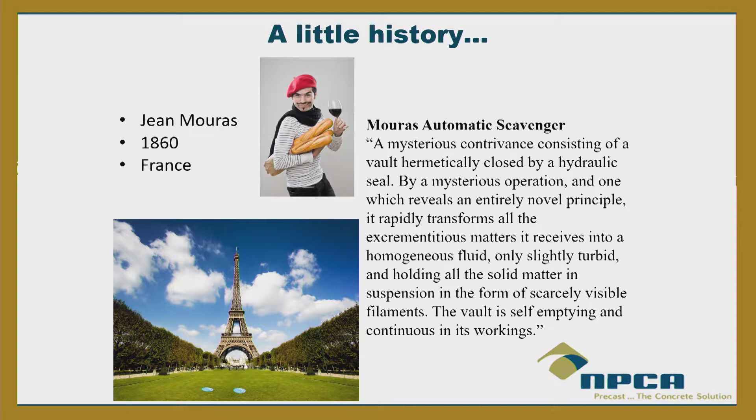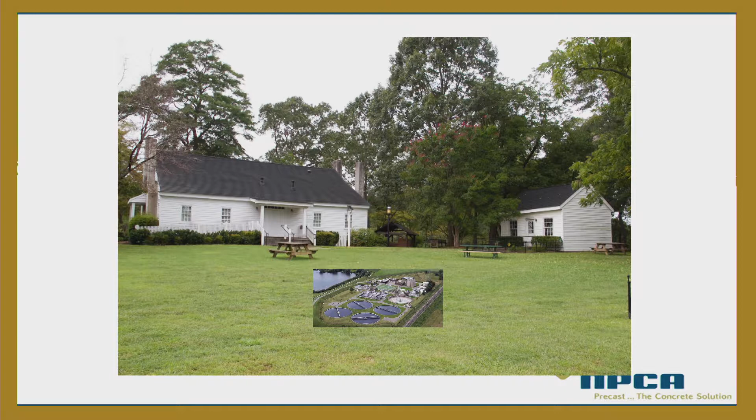That's right - self-emptying. It's really an amazing piece of infrastructure sitting right in your backyard. I mean, I'm showing a big centralized sewer system, but really it's a sewer system in your backyard. Very sustainable, and it does this pretty miraculous thing and returns it to the soil. It's really an amazing piece of infrastructure. I don't think a lot of homeowners realize what they've got back there.

So very important to maintain, but also important to be aware of - it could pose a safety threat. One part of that system, just one part of the whole system, is the septic tank. Whether it's precast concrete or plastic or fiberglass or what have you, the septic tank serves a very important purpose in that chain in order to take that material.

There is some treatment that goes on in the septic tank - there's some separation mainly, some physical processes, some biological and chemical processes that happen in the tank before it goes out to the field. But mainly it's there to prevent surges from going to the field, help in separation, help reduce TSS, a little bit of BOD. But it serves a very important function because it's the very first thing in the chain.

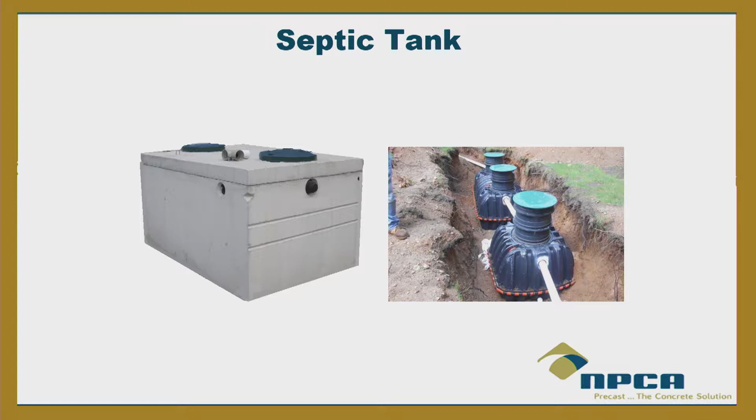Usually the tank is the first thing, so it's got to be installed efficiently in order for the system to perform. Now, in order to maintain and take care of this very important vessel, we have to have access points. Different states have different requirements, but basically you usually have to have an access point above the effluent and above the influent, and sometimes above the baffle wall as well in a two-compartment tank.

So tank access is very important for maintenance and inspections. The TCEQ rules - I'm just going to go over the rules real quick as a refresher - say that the inspection or clean-out ports should be located over the inlet and outlet devices, and that the smallest dimension should be 12 inches.

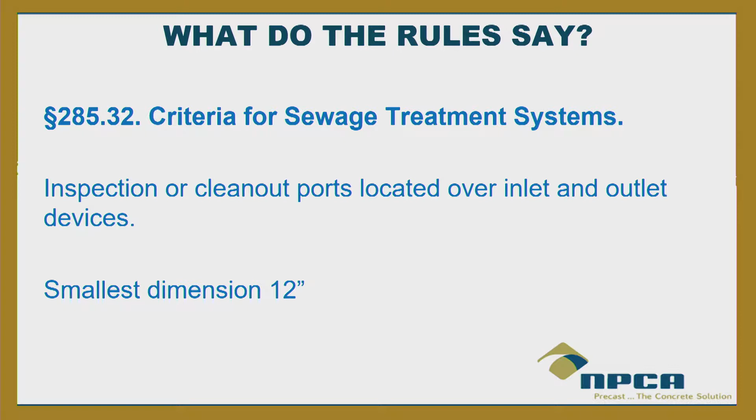So in a lot of cases, are they 12 inches or larger? Usually around 24 inches above the inlet and outlet, would you say, or just 12? 16 or 20? Okay, 16 or 20 - enough to get the effluent filter out. For those of you who've been in the industry a long time, would you say there's a trend that access is exposed more and more? Or do we bury them more? Anybody agree? Some say no.

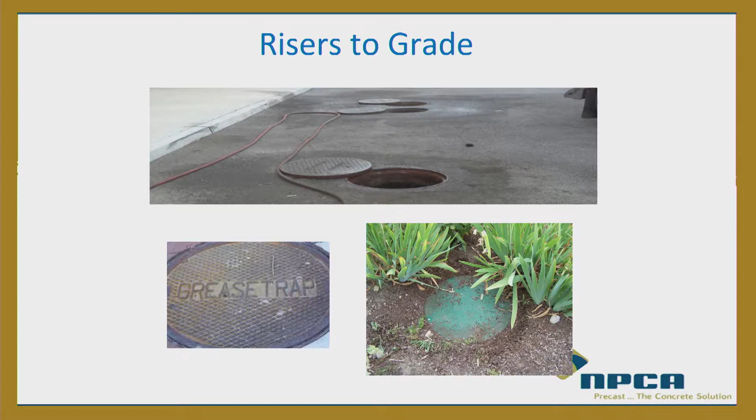Okay, well it depends on where you are I guess. They don't charge enough money to dig them up. From the feedback I get talking to people around the country, it seems like we're going more and more to grade, because we don't want to have to look for it, and there it is. So the risers to grade - whether it's just a short concrete riser or a really tall riser - that might be a challenge.

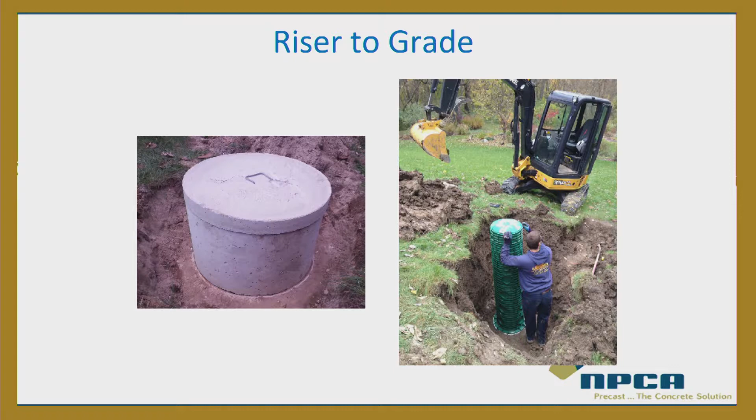But we're bringing these risers to grade, okay. Now in Texas, the rule is that tanks buried more than 12 inches shall have risers, and the risers should come to no more than 6 inches below the surface. So would you say in most cases it comes right to the surface? Is that fair, depending on where you are? Okay.

It also says the risers should be sealed to the tank. So now we're talking about safety, but we're also going to talk about water tightness and efficiency of the tank. Because when we're talking about the riser system tied to the system itself or to the lid, that goes a long way to making it watertight. To have a watertight tank - a lot of times the seams in the tank, whether mid-seam or top seam, are fine, but if you're going to get any leaking water, it's at that riser. You ever see that? At the riser, right? So the first thing we can do to make sure we have a watertight riser, and a laterally strong riser that's not going to move, is to have it embedded - to have that first section embedded.

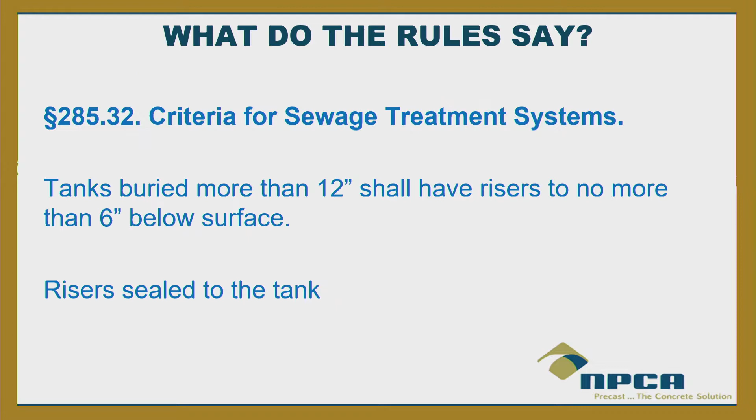I don't think it's an actual requirement of TCEQ, but it just says that it shall be sealed to the tank. So how do we seal it to the tank? If it's not embedded, then what do you seal it with? It doesn't go that far. Some people do go farther than that, they say how to seal it. But if it's got to be sealed to the tank, what do you use?

Ram-Nek? Okay. Tar? Okay. So like a butyl sealant, right? Something like that? All right. A butyl sealant, well, I'll get to that in a minute. But a butyl sealant works very, very well in keeping that sealed. Now, unless the manufacturer of whatever you get proposes something else - I know there's a foam sealant that I saw that was part of one of the riser section manufacturers. Whatever they suggest, that's what you should do. But for a concrete riser section, a butyl sealant works very, very well.

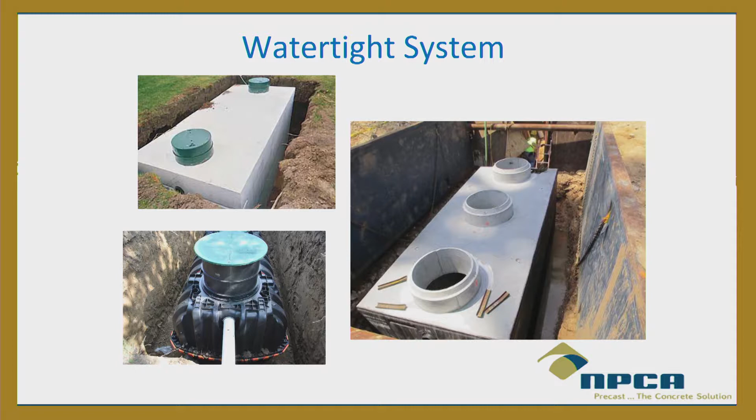Now, there are lots of homemade systems out there, or lots of experts. Like this one, for example. I found this on the internet when I was doing a search a couple years ago. Somebody was asking, any recommendations for a septic tank riser? I just had my tank pumped, and I had to dig up the access cover. I'd rather not have to dig it up next time. It's about 18 inches deep.

And Just a Lurker - I hope Just a Lurker is not in here, by the way, and I'm sorry if you are. We can talk later.

Most septic tank companies sell the plastic risers, but they're expensive. You know what I would do? A 55-gallon drum and a lid. Cuts down work super duper and can often be found for free. I'm not sure a plastic drum and lid would take the weight over time, but my steel drum is still okay after 15 years. So you have these sorts of experts.

Now, how many of you - I'm almost afraid to ask this question - how many of you have seen the 55-gallon drum riser? Oh my God. Okay. All right. 55-gallon drum riser. Wow. All right. Well, not recommended, but you might say, oh, it works just fine. But maybe if it's embedded, I don't know. No, I wouldn't say - I wouldn't recommend it. I'm not going to go that far.

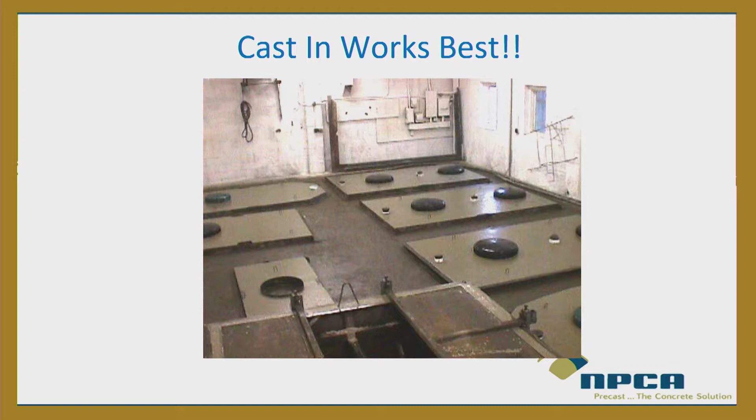So cast-in works best. If we can use a system that is made, that is intended for this, cast-in systems work best. Even if you're using a concrete, a grout of some sort to cast it in on site, that's okay, but it's still - the soil is going to move, the tank is going to move. It's the same thing as trying to grout in a pipe, which apparently has been done there too. And grouting in a pipe is not a great way to make a pipe connection watertight, as you probably well know. Okay, because the pipe is going to move, or the soil is going to move, and the thing about cementitious grout is it doesn't have any elastic properties whatsoever. So in other words, it only moves once, and then after that, it cracks, and then water's going to get in.

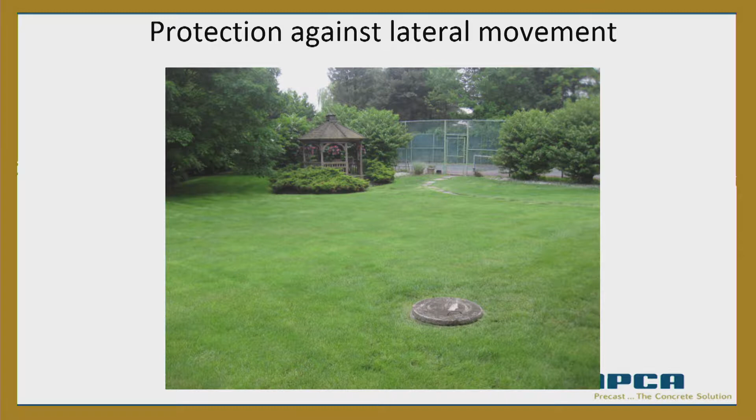So the same thing with the top. If you have a top and you grout it, but it just sits on the lid and you grout it in, then there's still a chance that it might dislodge after a period of time. But it's better than just sitting it there. Because we also want to protect against lateral movement.

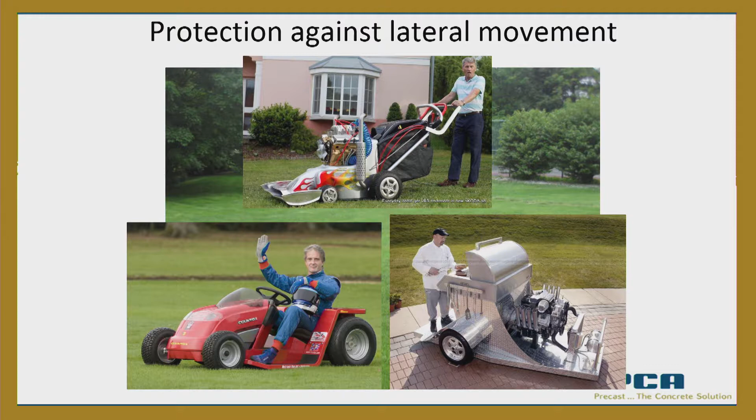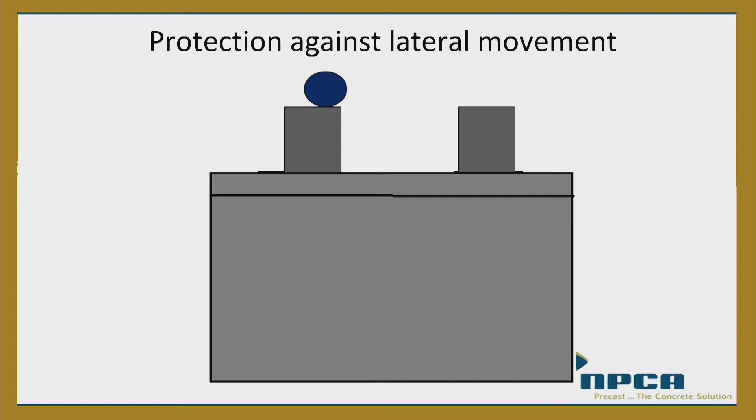Now, I know that most of these tanks are not rated for traffic, but some of these mowers - have you seen some of these mowers? I mean, these mowers are almost like a vehicle, and so they take these turns right over top of these lids. That's a significant amount of force when you think about it. That's pushing that, that can push that riser over. Have you ever opened a septic tank lid? Do you see like a quarter moon down there, or maybe a half moon? So I see a few nodding heads. So that's something that we want to obviously try to avoid for maintenance reasons, but also for safety reasons. How stable is that riser?

So the precast riser sections, another thing that we can do, if it's not cast in, is at least if it has a keyway that you can set the riser in, and at least it's got some lateral stability to it, and then the adjacent risers above it. And then you can still seal those with a butyl sealant, but it gives it a little bit of lateral stability.

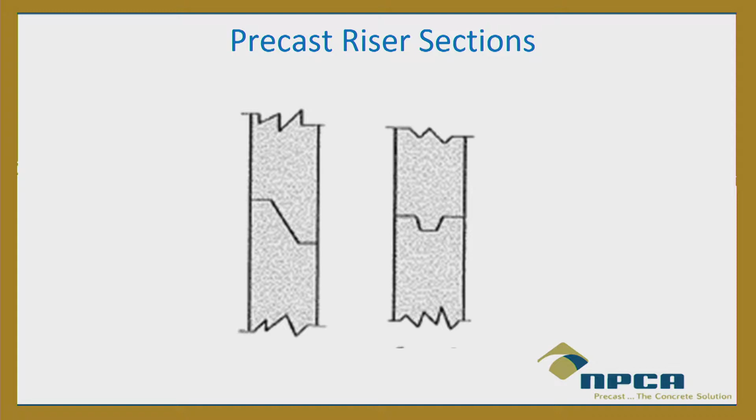Now here's the part about the joint sealant. The proper installation - I talk about this in my 115 class too, because that's about installation - but real quick, if you're going to use a joint sealant, the butyl sealant, C990 butyl sealant is the best sealant to use, because it's made specifically for these conditions.

And the thing is if you're using butyl sealant, just do one thing: knead it together. It just takes a minute. I know if it's cold out, that sealant's tough, and if it's warm out, it's real sticky. But if you can somehow knead that sealant together rather than just overlapping it or putting it side by side, it'll make a big difference in keeping that water out, or roots, or anything else. Because if you just overlap it or put it side by side, especially on risers, since you're not talking a lot of weight there, it can leave a pinhole. But if you just take a moment to knead it together and then lay it, you're going to have a much better chance of getting a tight seal.

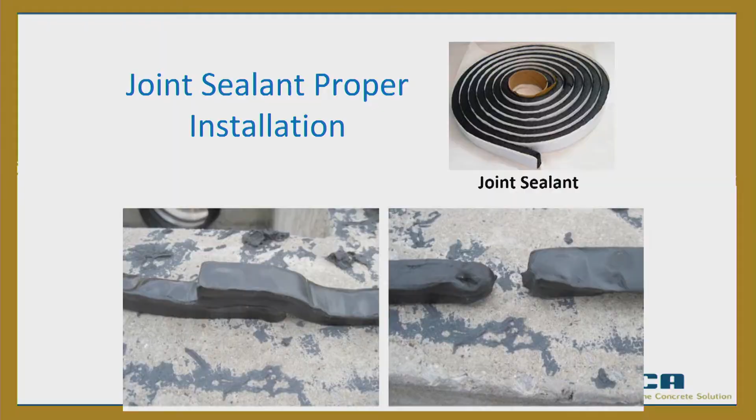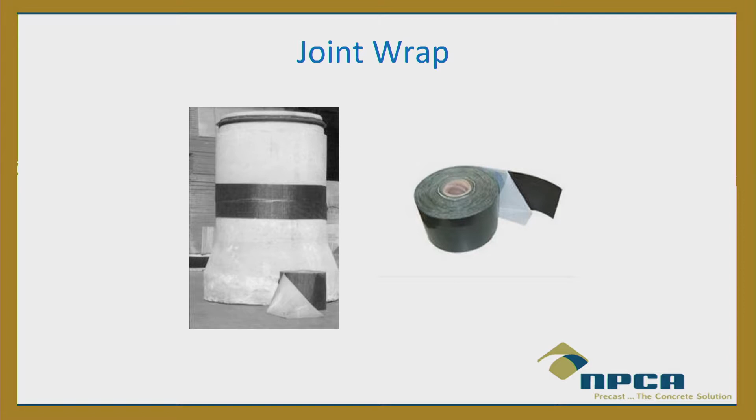Also, if you're looking at sealing risers, we're still talking water tightness here, you can use a joint wrap. Sometimes it's called chimney seal, but that can also be used on the vertical riser sections, if it's a manhole section or just risers or donuts.

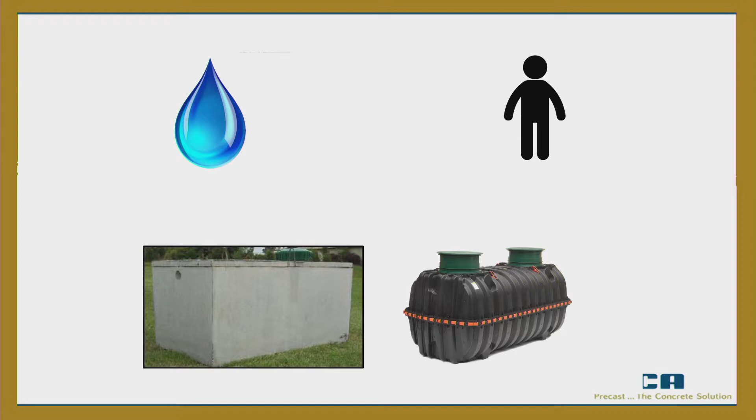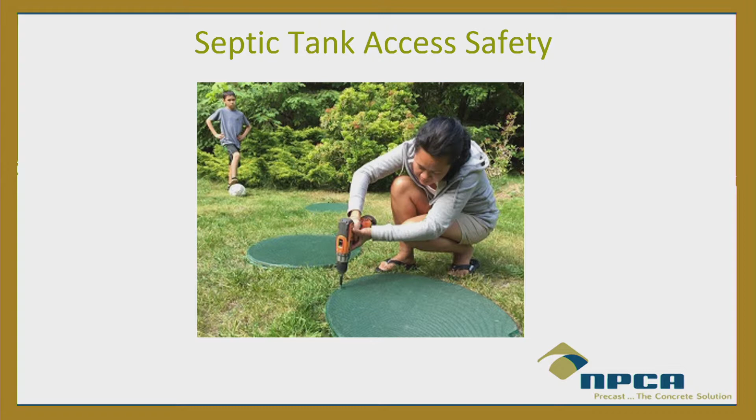Okay, so other than keeping water out, we also want to keep people out of the tanks. We want to keep people out, we want to keep pets out. We definitely want to keep water and people and pets out. So the access safety - let's talk about access safety for a minute. First of all, what do the rules say? 285.32: risers shall be fitted with removable watertight caps and prevent unauthorized access.

Now, people are going to get into a tank a couple of ways if they're unauthorized. They're either going to get in it accidentally, where they step on it and it's been corroded, or the structural integrity of it has somehow been compromised and they fall through. Or it's partially dislodged and they fall through, or it's not on at all and they fall through. So there's accidental entry, obviously unauthorized as well, but accidental. And then there's curiosity entry - somebody's trying to get in because they want to know what that mysterious gray or green circle is in the yard, especially kids.

I have a 6-year-old, I know how it works. They see that out there, and they see this shiny truck come every few months, hopefully, and a guy sticks a hose in there and then leaves. What in the world is in there, right? So then there's the curiosity part.

So that's a little harder, the accidental fall part. That's just having a system that is strong and is not compromised somehow, that hasn't been compromised by UV rays or what have you. Then there's the part about keeping people that are trying to get in, at least to a certain extent - at least to dissuade them from getting in, if they go at it and go, 'all right, let me see here, oh, I need a hex tool or I need an Allen wrench, you know what, I'm not even going to bother.' Sometimes it just takes that much, and then they just go away.

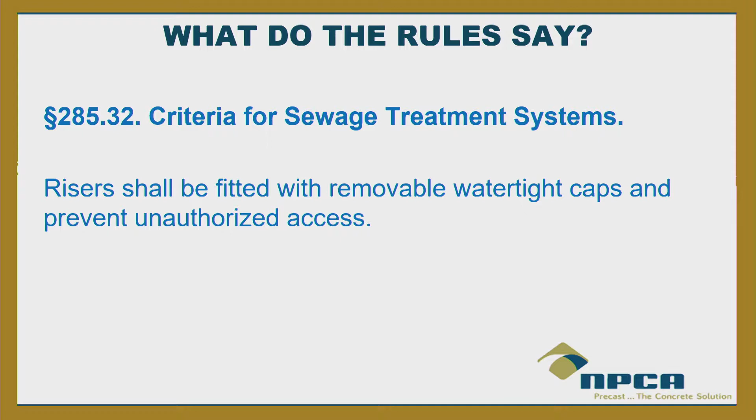That's an owner thing. So what I would suggest in those cases, when I talk to maintenance providers or parents, is take the mystery away. If the kids don't know what's in there, show them. Open it up and say, look, that's what's in there, and it's dangerous and it can kill you. Do you have any questions? Then the mystery's gone. They've seen it, it's dirty water. Maybe that works for some kids, maybe it doesn't. So that's unauthorized access.

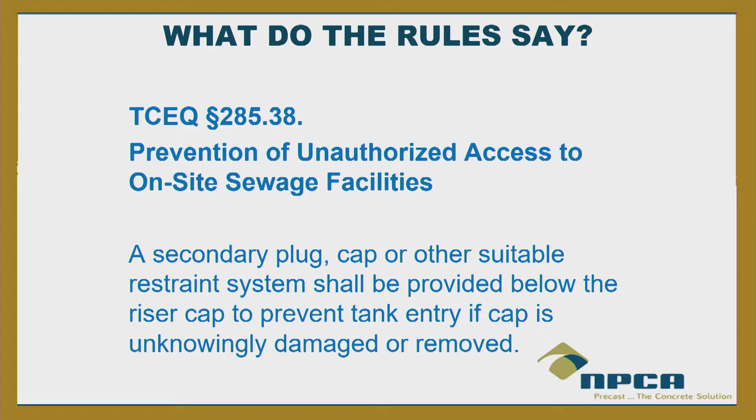Now the TCEQ goes on. That was Section 32. There's a section just for this, just for unauthorized access. I've never seen that in any other code. Prevention of unauthorized access to on-site sewage facilities: a secondary plug or cap or suitable restraint system shall be provided below the riser cap to prevent entry if the cap is unknowingly damaged or removed. So the idea there is to catch somebody, or at least provide some sort of secondary restraint if the first cap happens to fail.

Now that's not going to dissuade the curiosity people, but at least it'll dissuade the accidental people.

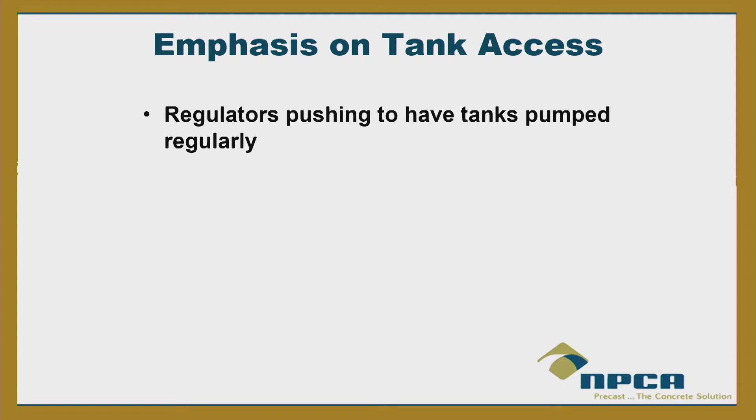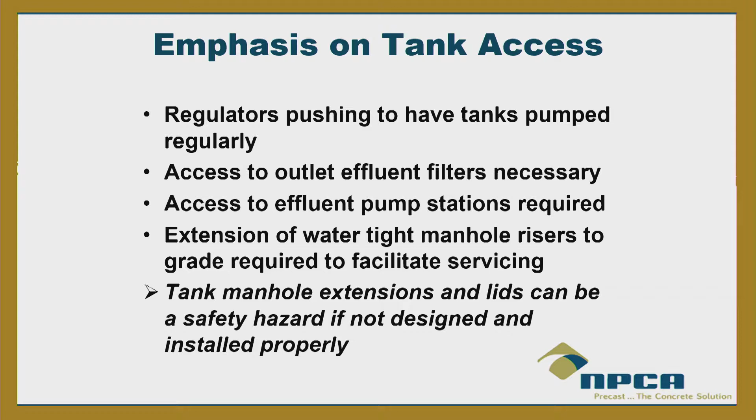We keep harping on homeowners to have their systems maintained, so we have to have it pumped on a regular basis. We need access for the outlet filters, the effluent filters. We need access for the pumps. Extension of water-tight manhole risers to grade facilitates servicing. Tank manhole extensions and lids can be a safety hazard. So these are the things that are pushing us more and more to having these lids exposed. And you may have had these situations happen here in Texas. I'm guessing it has, for these rules to be in place. But it happens all over the country.

This story happens way too often throughout this country, throughout North America. And it's an avoidable tragedy. It's just very, very sad.

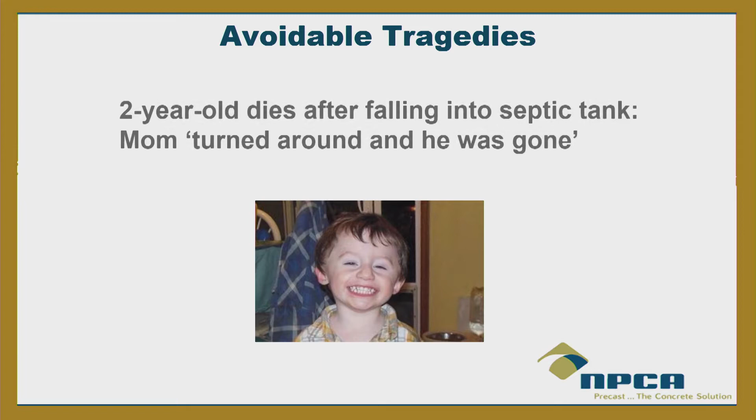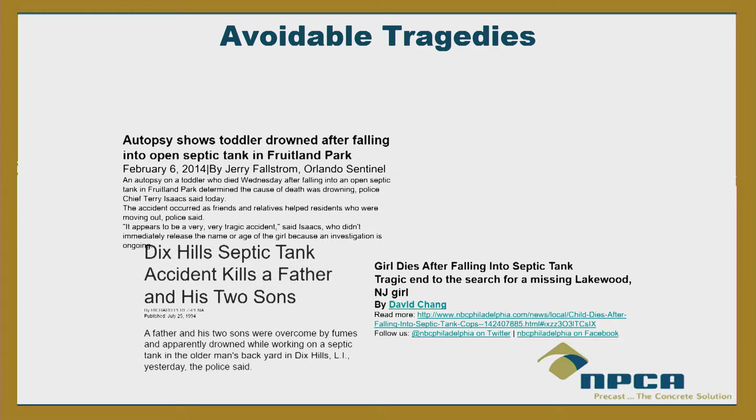For that story, for every story, there's more and more and more. You just do a quick search, from all over the country. And it's not just kids, it's adults, it's service providers, it's pets. First of all, homeowner education is critical to try to teach them about what's in that tank, a little bit about the dangerous gases that are in there, and the importance of having some sort of secondary mechanism in there.

Think about it: if we have a swimming pool in the backyard, we get real worried about the kids. When we have a swimming pool, we have those covers in the winter. If we have a retention pond nearby, parents get worried. But then we have the septic tank in the back, and all it's got is just a cover, right? And unlike a swimming pool or retention pond, you can send your kid to swimming lessons all you want—it may not help in a septic tank. It probably won't.

So here's a situation where we had 3 men. I forget where this happened, but one by one—it was a situation where one man went into the sewer system and was overcome by poisonous gas. We're talking about H2S levels up near 1,000 ppm or something crazy. So he was overcome, and then the second person looks in and tries to go rescue his friend. He was overcome and died. And then a third one did the same thing. In a lot of cases, that's what happens here.

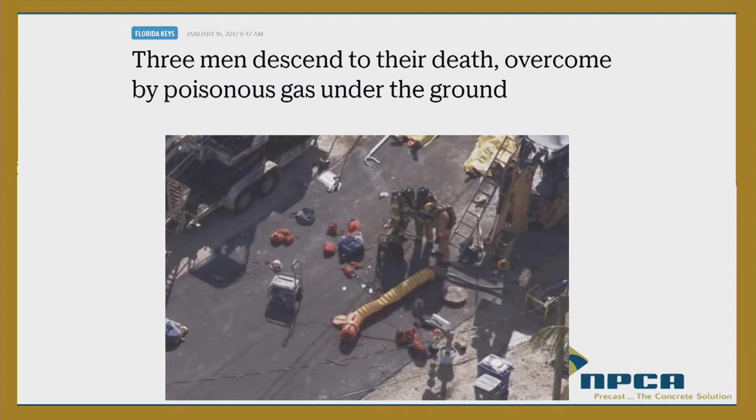I read a story about a man who rescued a child. He went into a septic tank, rescued the child. The child was saved, but he unfortunately succumbed to the gases. So if it's not the drowning that'll get you, it's the gases, right?

Because those poisonous gases, when you're talking about inside a septic tank, when you have this digestion that happens, you have all these gases that are released: methane, hydrogen sulfide, carbon monoxide, carbon dioxide, ammonia. There's gases that are released that are very, very dangerous.

H2S gas just by itself—if you're exposed to even as low as 100 ppm, you can get eye irritation, coughing, the symptoms. Up above 100 to 150, loss of smell. So that's olfactory fatigue.

The dangerous thing about this gas is you can stop smelling it. You don't detect it anymore. First, when you smell it, you detect it—that rotten egg smell. But after a while, it's like, oh, it's not here anymore. Well, it's still there, but you're suffering what's called olfactory fatigue, where you're not actually smelling it. And that's even more dangerous, because now you're no longer even aware of it.

Then when we get around 500 ppm, you could be collapsing under 5 minutes. And then 1,000—when you get that high, and there are levels that high, because we're currently doing some studies on H2S gas in septic tanks. We're putting meters in, and the meters are topping out. These are meters that go up as high as 1,000 or 2,000 ppm. When you're in that kind of environment, it knocks you out. There's no warning, right? So very, very dangerous.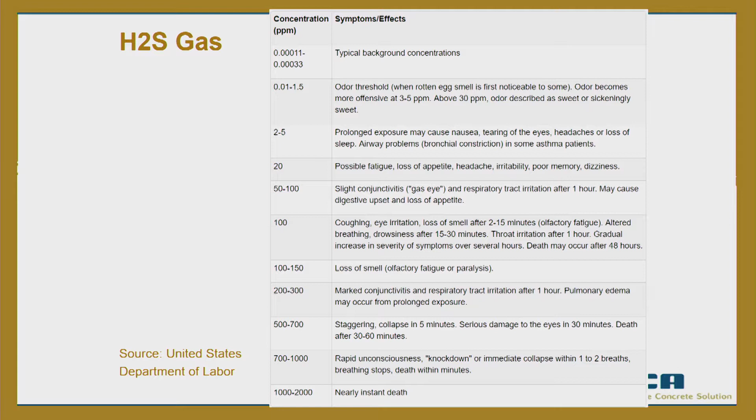When that happens, it's sad already that a life has been lost, but then you're talking about lawsuits. No matter how much you think you did your due diligence, so you should be okay, everybody gets pulled into it. At the end of the day, even though you may be absolved of any financial responsibility, your name has been in the newspaper accompanied by the death of a 3-year-old boy for the last 4 months. It's just not something you want to be in the paper about.

But if you're involved, the cost is lawsuits of millions of dollars, medical bills, veterinary bills—versus a $50 for an additional lid or $25 for a safety net. Don't quote me on those, but somewhere around that. So worth looking into, right? Kudos and bravo to you for having that in the rules.

Now, can you tell me why it's in the rules here? Has it always been in the rules? No. So what's that—somebody died? So there was something that happened recently. Was it one particular thing that happened and all of a sudden it got pushed through into the rules? Well, sad for that loss of life, but very, very good that you've got that in the rules.

And we're trying, as an association, to get it into ASTM. We're working with ASTM C27. ASTM is the American Society of Testing Materials, and they've got a standard for septic tanks and one for grease interceptors—C1227 for septic tanks, C1613 for grease interceptors—and we're trying to get language in there.

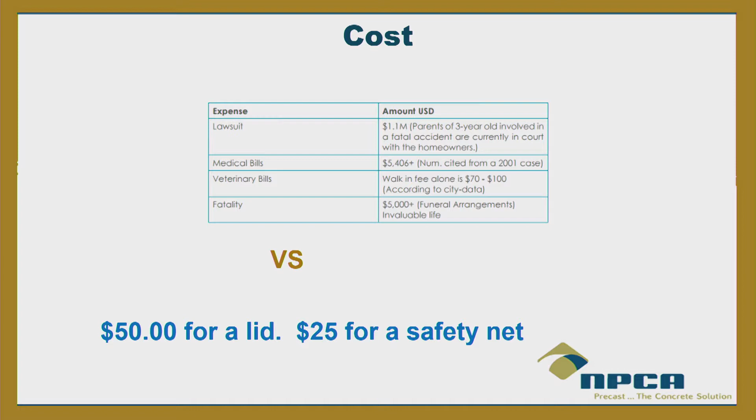We're trying to get them to require secondary access, or secondary protection. In the TCEQ 285.38, it says that lids should be protected against unauthorized intrusions. Acceptable protective measures include a padlock, a cover that can be removed by a specific tool—not just a Phillips screwdriver, but something you'd have to really dig around for, or something you may not have—a cover having a minimum weight of 65 pounds, and we went to 65 here. ASTM is 59, but 65 here. Or any other means approved by the executive director. That's what's currently in the rules.

So what do you see the most here? Is it padlock? Is it screw? Is it weight? Screws? Okay, and how's that working? Is that fairly good? I see some nodding heads. What's that—the screw holes wear out? So screw holes wearing out, that's one risk, right?

And then perhaps even the screws not being there. Have you guys ever—I don't know how many maintenance providers do we have in here? Okay, there's quite a few. So how many times do you get there and the screws are missing? I'm asking you this question for my edification, because when I go talk to people about this, I want to know. So when you get there and the moment you arrive, there's screws missing, what do you do? Because isn't there an amount of liability there all of a sudden that they're going to say you're the one who lost those screws? Do you step back and go get the homeowner and say there's screws missing here? What do you do?

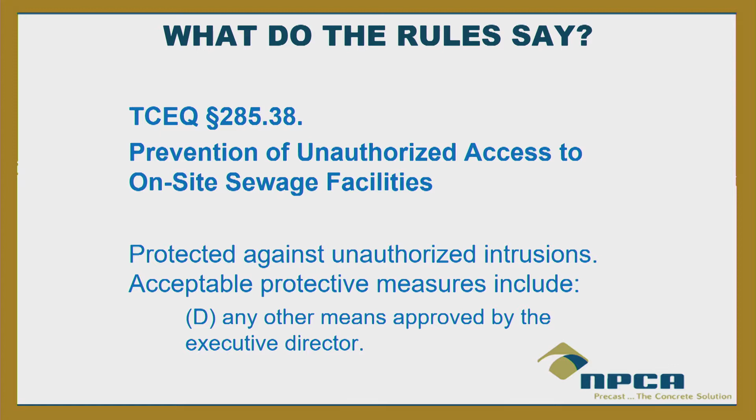So you write it in the report, and I think I've got it in here later, but yeah, in the rules, there's also a requirement, right, to write it in the report every time you open and close a system, noting that you've done so.

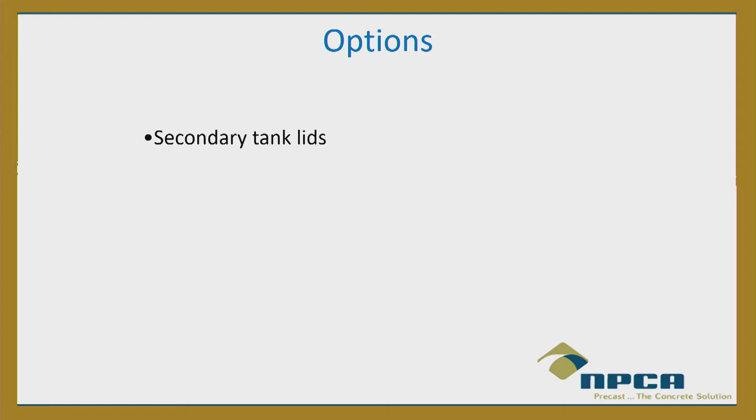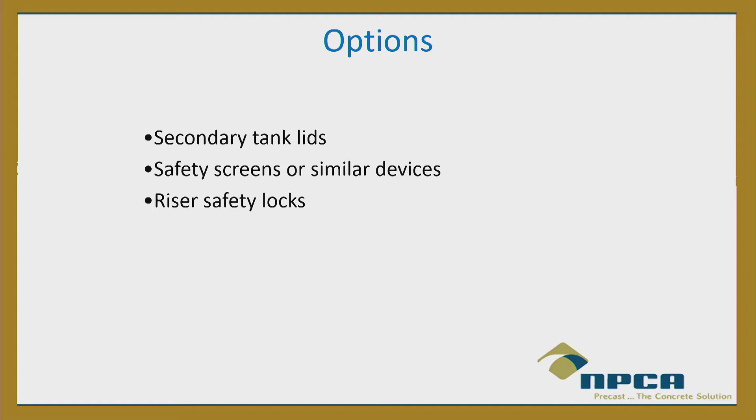So let's talk about the options real quick about what's out there for secondary, or even primary, means of safety, or keeping people from getting into the tank. There's secondary tank lids, where you have two lids - a redundant lid underneath and another lid. There are systems with safety screens, and I'll show you examples of that, plus safety locks and tamper-resistant riser cover screws.

So we all talked about screws. Now, some of them are locked. Some have padlocks - or not a lot of people do that? Not a lot? Okay. So I assume with the padlock, you've got to have the key, right? So if you don't have the key, that's an issue. But some of the systems use a padlock.

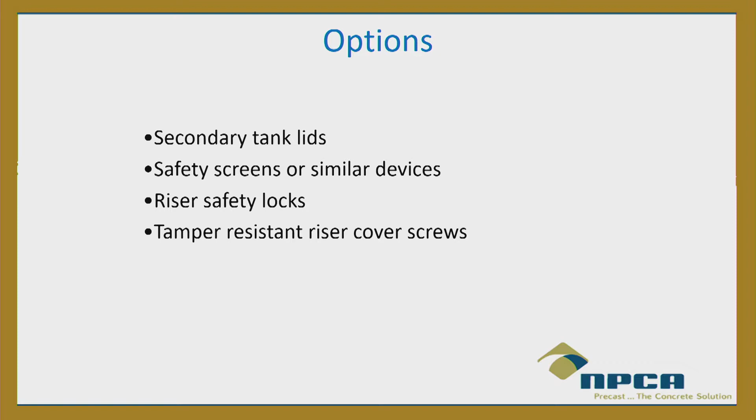Now, ASTM, as I mentioned, requires a 59-pound lid, or it must be provided with a locking system. So you have the option, okay?

So in this case, what some do is make a lid at the same level as the concrete lid, or the lid of the tank, and then have another lid up above. Depending on the riser height, you've got to remove the primary lid, then get down to that secondary lid, which may be around 50 or 60 pounds. Is that hard to do? Do you ever get into situations where, you know, getting down there is a challenge? I don't know how tall these risers get here in Texas, but sometimes that can be a challenge, I'm sure.

Okay, what's that? Oh, you've got to carry a loop? Oh, okay, to pull it up. Okay, yep.

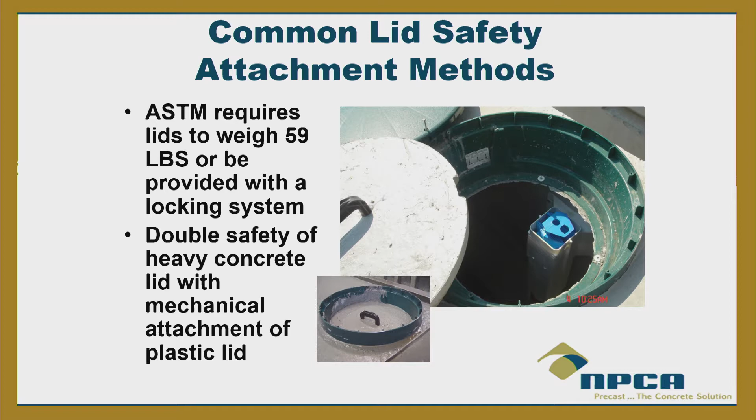So some systems are made to do that. There are manufacturers that make safety mechanisms designed to prevent somebody from falling in. This particular product, and I'm sorry if I forget anybody at the show that has a product, but I walked it this morning and I thought I caught everything - this is a Polylok. They're at the show, you can go talk to them about it. This is called a kid catcher, and it comes in different types for different sections.

Right, so they don't have to be screwed in. What he just mentioned is the rules don't say they have to be screwed in, right? And I don't think most of these secondary attachment systems are screwed in. I think they're meant to be - basically they can't go down, but they can go up. So they're meant to facilitate maintenance so that you can just pull it out, perform your maintenance, and put it in. So these are not a deterrent like a lock, like a padlock and screws.

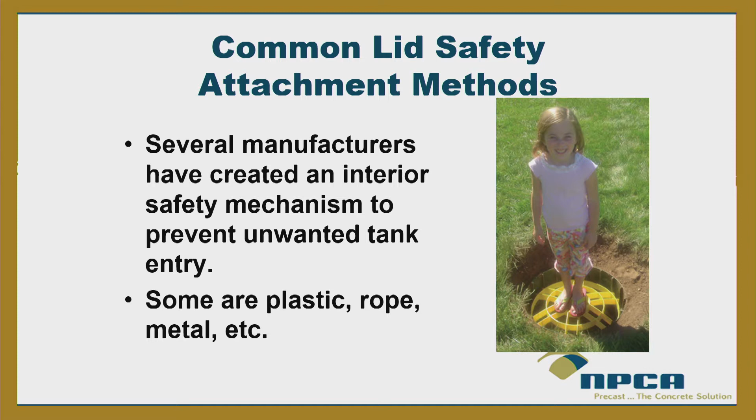This is just a secondary catching mechanism, okay? So it's not meant to be a lock, right? So yes, it does come out. It's not very heavy, it's lightweight, but these are designed to hold, you know, 250, 300 pounds per square foot, okay? So they might hold me, I don't know - I'm not going to try it, but that little girl's safe. I'll give it a try out there later today if you guys want to come see it.

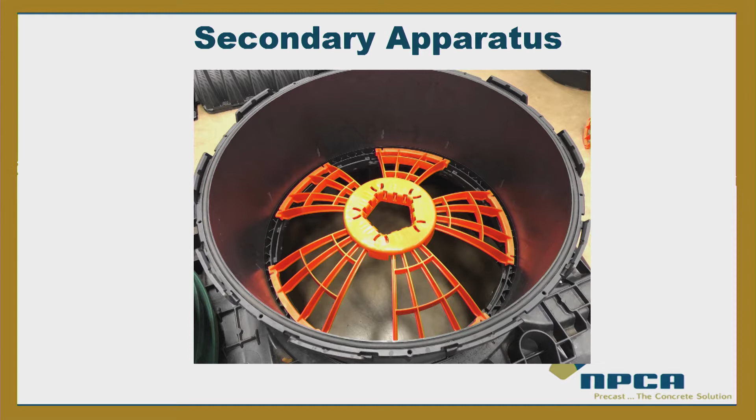So there's a couple of different systems. I just took that picture this morning. Infiltrator's got a system at their booth too, so I wanted to show that as well. So they've got one.

This is a system by Tuf-Tite. I know they've got a booth here. That's the same thing. I don't know if those are screwed down. Now it looks like there's screw holes there. Not in the rule book that you got to be screwed down, so often they're not screwed down.

A lot of home inspectors are making you screw it down. Oh really? I wonder what they're citing as the rule for that. Is that a building code thing?

Oh, it's for whatever it's designed for. I see. So sometimes these are screwed down. Unlike the kid catcher, I think this is designed where you're supposed to be able to put your hose down in there and perform maintenance. So that's the idea there, that's why it can be attached.

Netting - now I think this is a system, I don't know if Gary's in here, but I think this is a Simtech system, and they're here. Now the thing about the netting, or anything that has hardware, is that the hardware has to be able to resist the environment that's in there, because that environment is pretty aggressive. So you can't just have regular steel screws in there - it'll rust away, get eaten away, and then somebody will fall right through that rope netting. Or even the netting itself has to be made of a material that's not going to be eaten away.

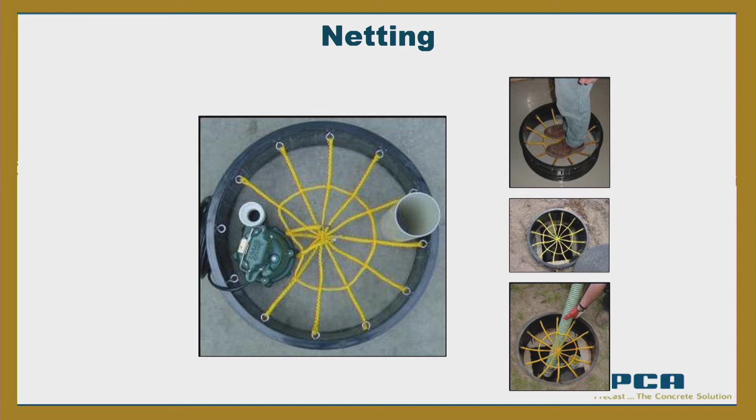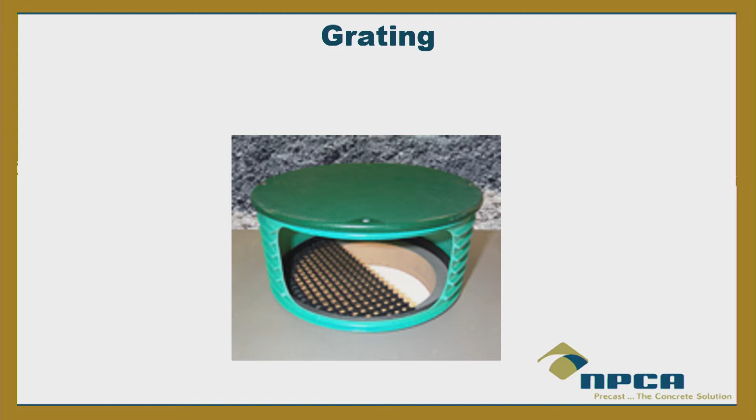You see the netting used around here? Somebody, I got a yes there. Okay, so that's a 4-inch pipe he put in there just to show the size. There's another one, I forget the name of this company, but they've got a system of netting. That might be a Tuf-Tite. So that's a grate, I don't think that's screwed in, that's just laid in there.

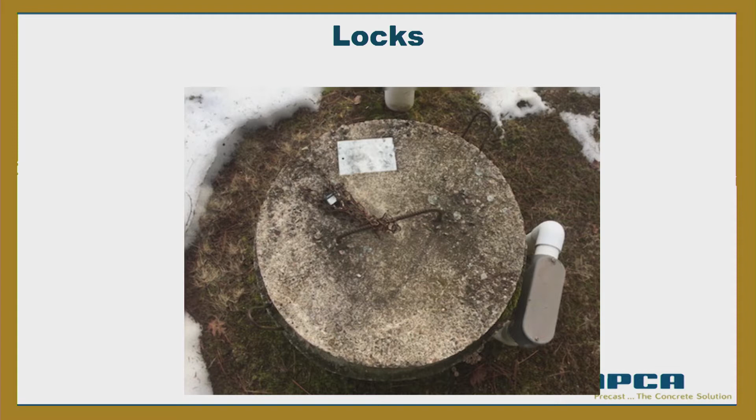Here's a system from Brenlin, and it's got an inner safety lid. The thing about using something with locks is you got to make sure you lock it. Here's the handle for this lid, but the lock is just sitting there on a chain, so it's not locking down anything. So you just got to make sure it's locked down.

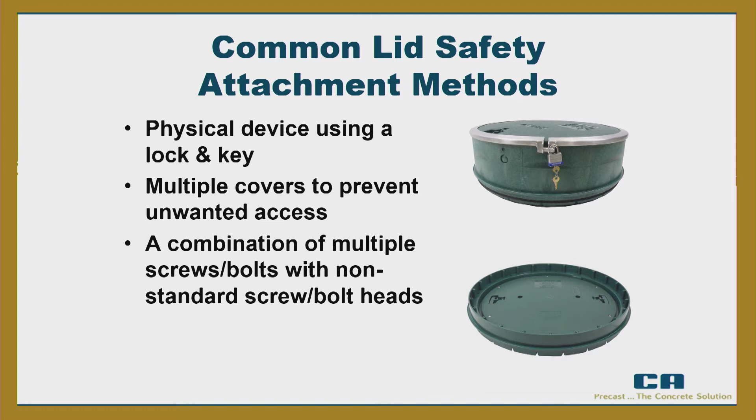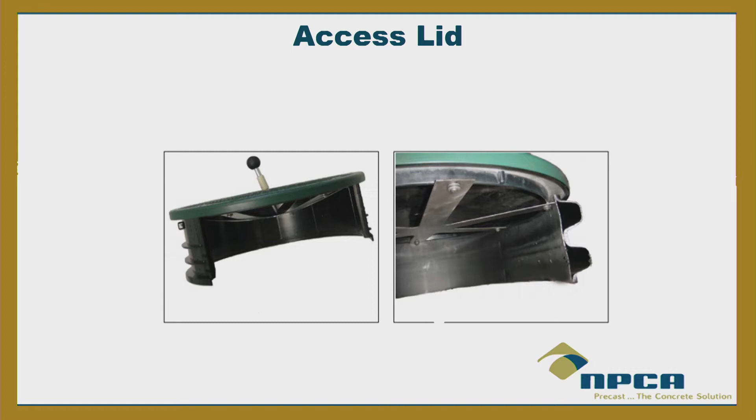Here's a system with a padlock, so multiple covers - that one can have multiple covers in it, but it can just have the padlock system. Here's one that's got multiple covers in it, and I think this is a Tuf-Tite system. Here's a Tuf-Tite system, and this is a Simtech system. So like I said, all these exhibitors are on the floor. Orenco, this is Infiltrator - that's an Orenco system.

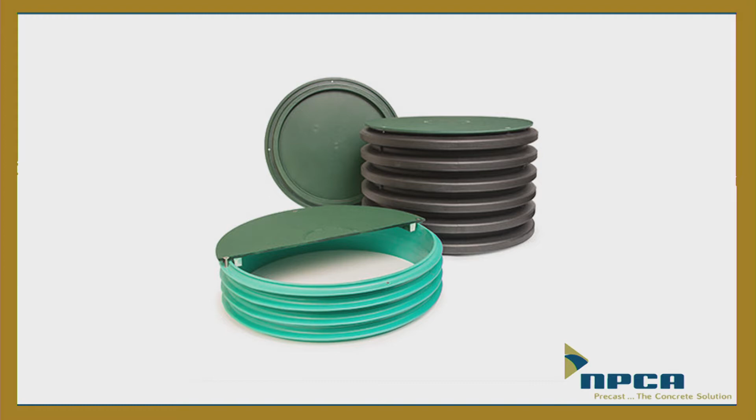So this lid is manufactured for a 20,000 pound point load. The thing about plastic lids is that they have to be UV resistant, because the sun, if it's exposed for long periods of time and it's not made from UV resistant material, it can actually be eaten away and can fail under pedestrian load, right? Have you ever seen that? You ever seen a plastic lid collapse? You have? Okay, so just make sure that whatever you're using, or your supplier is using, is made of UV resistant material.

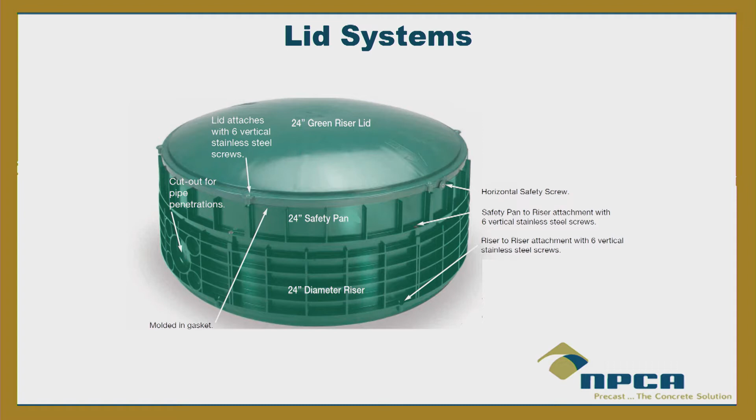Any other systems that I haven't mentioned here that you see out there that it's worth mentioning?

Now, for those of you that are maintenance providers, how do you feel about these systems? Now I know it's all good - of course, protect the kids, right? Protect the kids. But how is it impacting you in terms of doing your maintenance? I mean, is it something where it's not too bad for the most part, or is it adding a lot of time?

So your thing is having the riser, having the lid at grade. Above grade, that's what you want to see, for the reasons you just said - the grass growing in it, but also being able to find it. And fire ants running in. Okay, so bring it up above grade.

What else? Anything else? Diameters, larger diameters? 12 inches is hard to work through, isn't it? Yeah? Okay, larger diameters.

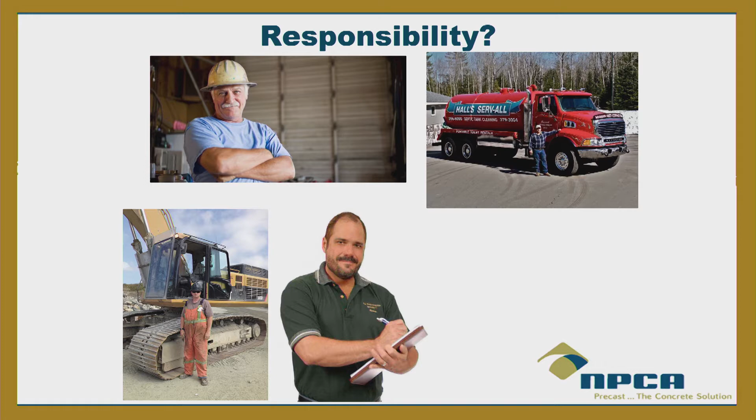So you're in a situation, it's a tough situation. I can appreciate that, because you get there and you have to document that, and you have to protect yourself, and you have to talk to that homeowner and say, there were some screws missing, this thing was open. You gotta make sure you keep that on. Who was the last person in here? Because I maintained this 6 months ago, but as you can see here, I closed it and I screwed it shut. So unless you're having somebody else in here, right? And if I was a parent, I'd want to know if somebody was messing around my septic tank.

And then the homeowner, of course, has to take a burden of responsibility. And I know, I'm preaching to the choir here.

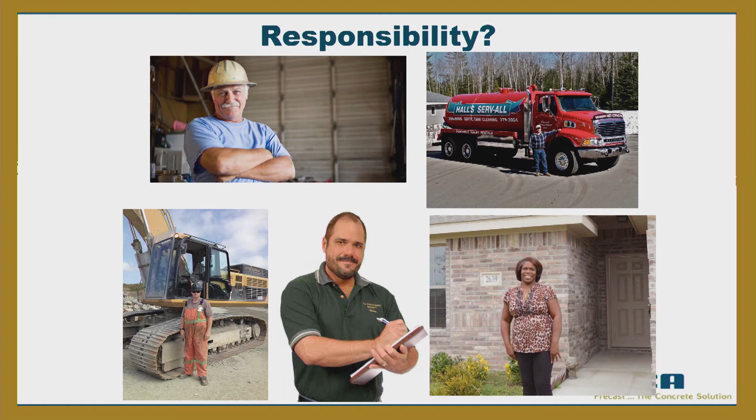So the rules in terms of responsibility: any person who accesses any secured lids or cover on an OSSF shall secure the lid and cover when the access is complete, and the reports must document that the access to the inspection or cleanout ports were secured after the maintenance and inspection activities. So it's a means to protect yourself and to be able to document that that system was closed when you were done.

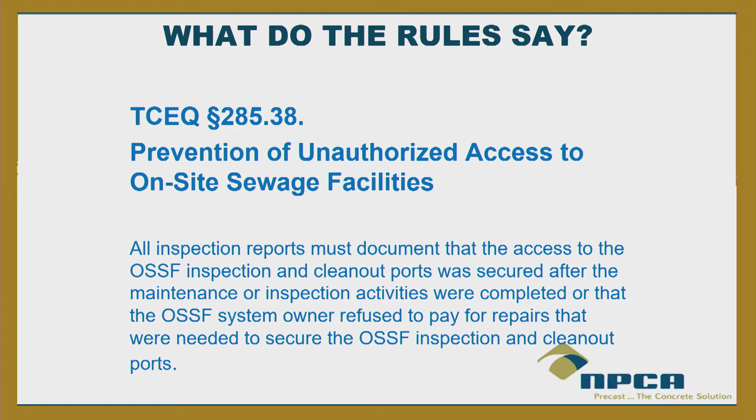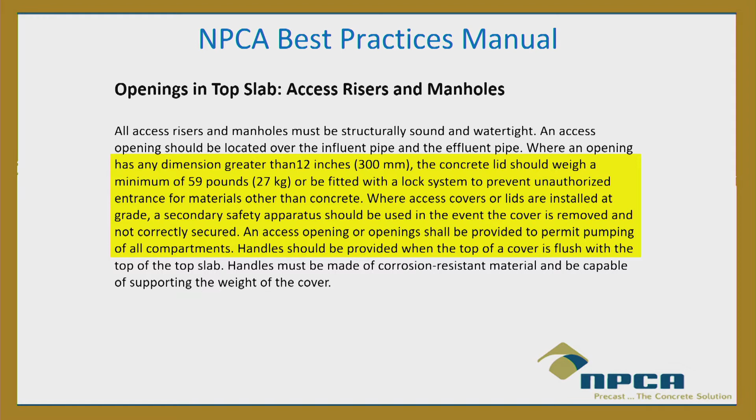Now, in our best practices manual, in the NPCA, we have a best practices manual for on-site wastewater systems. In there, we say when it has a dimension greater than 12 inches, a concrete lid should weigh a minimum of 59 pounds, like ASTM, or be fitted with a lock system. Where access covers or lids are installed at grade, we say a secondary safety apparatus should be used in the event the cover is removed. Now, this is not a rule, this is a recommendation, but this is what we want to see in more rules, and we want to see in ASTM. Handles should be provided on top of the covers, obviously, to be able to pull the cover up.

Homeowner education - I know TOWA probably has a system, I'm sure TCEQ has a system of giving them flyers and websites they can go to. There's only so many things you can do. You got a lid in your backyard that could be a danger to your children. What else can we do?

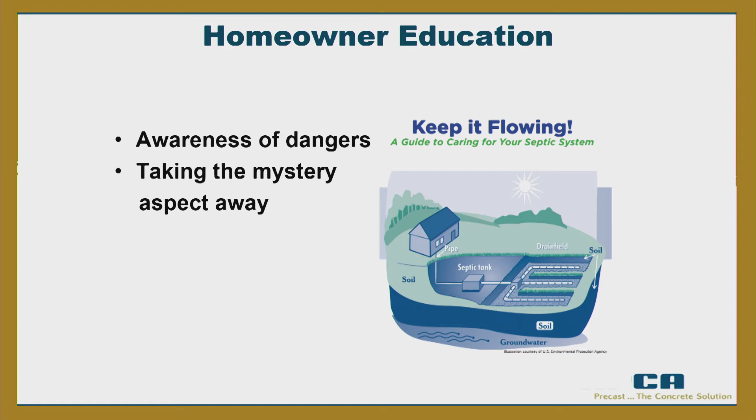I wanted to mention a couple other things before we finish up with lids. How much time do I got here? 15 minutes?

Can I go longer? You guys aren't hungry, are you?

All right, real quick on lids. So we talk about no traffic, but sometimes lids have to be traffic rated, especially for those of you that deal with grease interceptors—a lot of times those are traffic rated. And sometimes septic tanks are traffic rated. So what does that mean when you say traffic rated?

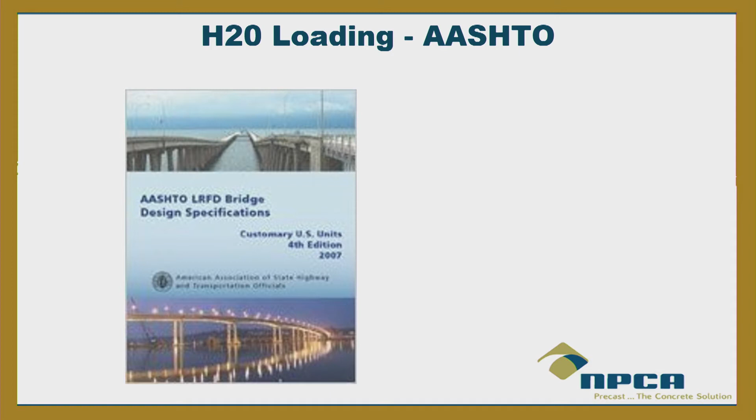I don't know if you've ever heard of H20 loading. Sometimes you may hear that—we say it has to be rated to H20, and you go, what is H20? Let me explain that real quick. ASTM also has a loading system, but it's not used nearly as much. The H20 in AASHTO is the same as A16 in ASTM. But what does that mean, H20?

That's the design. So when you see a traffic rated lid, you should see a thicker lid—chances are the lids usually have to be thicker. If you see traffic rated and you're still getting the same lid you always get, you should stop and ask the question: how is this traffic rated? Can you explain that to me? Can you show me something?

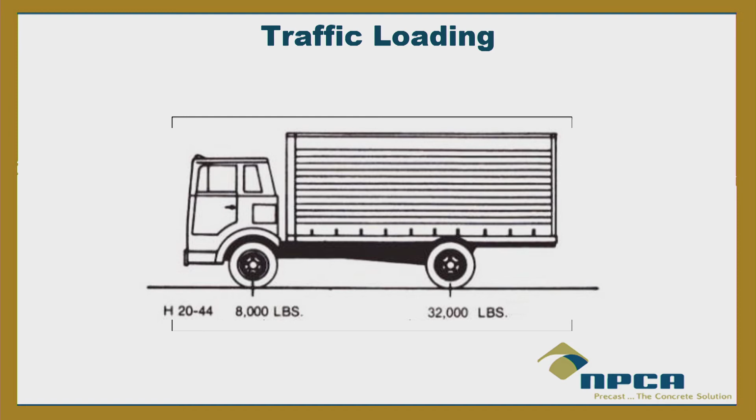Even the walls—because when you think about it, when you've got a tire on a casting putting a load, that load has to be transferred. It's not like the lid just holds it up and that's it. It's got to be transferred through the walls, to the base, to the soil. That's essential to any load—it transfers down. So if you've got heavier loads on the lid, that wall's got to transfer higher loads. I'm not saying they always have to be thicker, depending on the traffic rating, H5, H10, but same thing—you should ask the question.

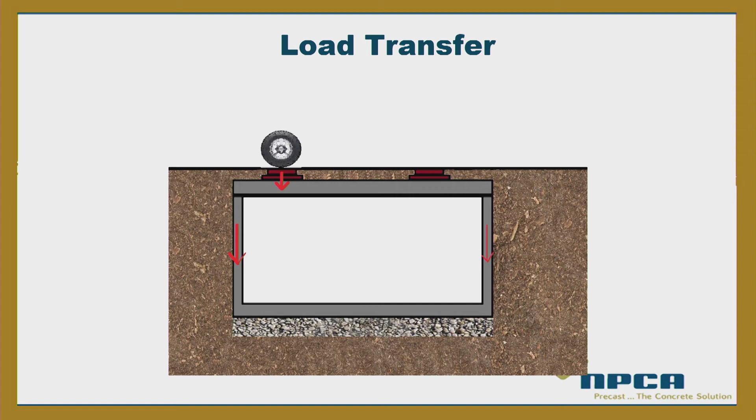This is a traffic rated tank, right? If that's required, it should say it on the tank. It should be stamped.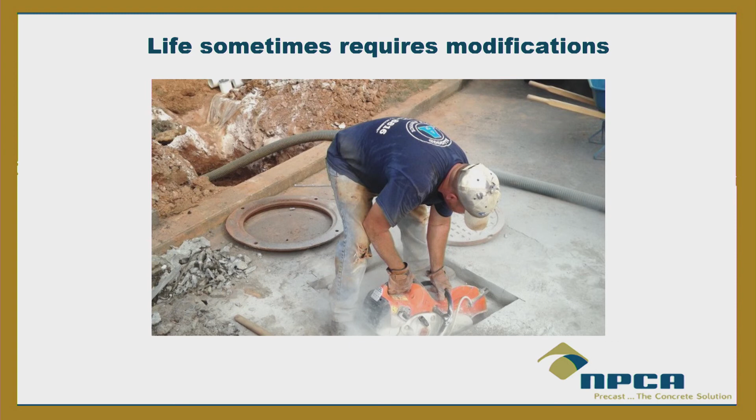So what you may have is a situation later on where somebody's not going to be falling through the access cover, they're going to be falling through the lid. This cannot just be done without consulting the precaster first, and the precaster should get an engineer involved. There's a way to do this, but you can't just start cutting away at a lid on site, cutting away reinforcement, because when the lid's designed, it's got steel in it.

The whole idea is that when a lid is pushed down by a force, the reinforcement takes over, because concrete isn't real good in tension. It's good being pushed together, but not good being pulled apart. That's why we put steel in it—steel is real good at being pulled apart. So the steel is in there trying to hold everything together.

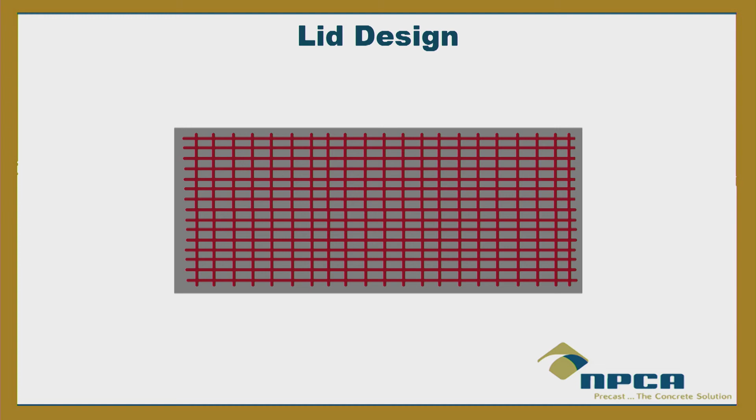The moment you put a hole in there, of any kind, you've cut out some of that reinforcing, and that lid is still going to take the same load. It's like you're taking that lid and trying to pull it apart. Imagine a piece of paper you're trying to rip, and you cut a big hole in the middle—where's that paper going to rip? Right there where you put the hole in, because all that tension concentrates on either side of the hole.

So now you have a lot of tension in a little space, and that's where you may have failure. That's why when we design these lids, sometimes when we put holes in, we put additional reinforcing around the hole when we're casting it, to make up for the reinforcing we're removing. That's when we're casting it like that—when you're cutting it in the field, you're not putting additional reinforcing back in.

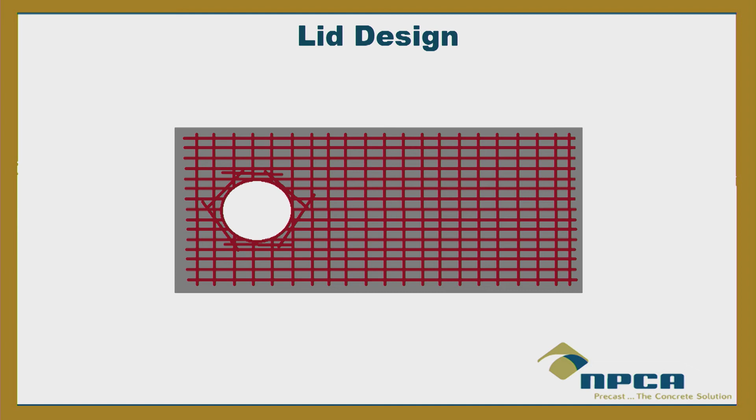So there are ways you can do it, but a lot of times it's just easier to get a new lid. Believe me, it's cheaper. Just keep that in mind if that ever happens. I don't know how often that happens, but...

Precasters, wherever you get your tanks—concrete tanks—should have a quality control program. If you have any doubts about a lid's ability to hold up... I was in a room like this, and someone who worked for an authority raised their hand and asked if it's okay to see the reinforcement on the bottom of the lid when it's delivered. I said no, it's not okay. We don't want to be doing reinforcement inspections on tanks that have already been poured. Believe me, we don't want to see the reinforcement.

She had been told and convinced that reinforcement sticking out below the surface of the concrete was okay—things like that are not okay. That lid is a very, very important piece. The whole thing's important, but we don't want people falling in through the lid either. So using a precaster with a quality control system that knows what they're doing is very, very important.

If you ever have any questions—as installers, inspectors, or maintenance providers—ask. I don't mind being asked, I don't mind being the one. I'd rather know, whether it's a member of ours or not—I'm going to try to help them if it's a quality issue.

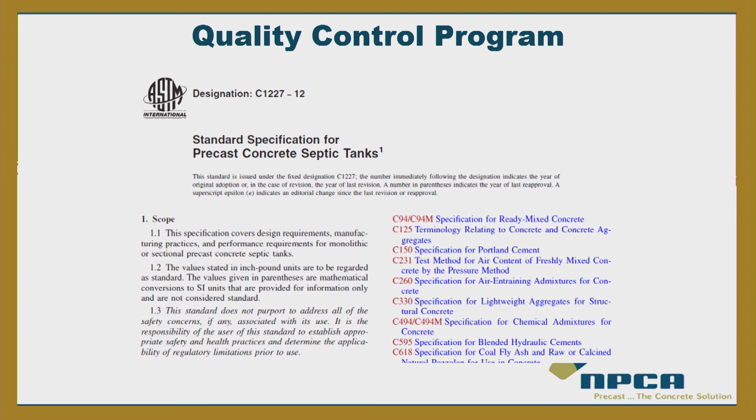I'm wrapping up. A quality control program means they're using quality control for raw materials, pre-pour batching, placement, and curing. I'll be talking a lot more about this in my session 115.

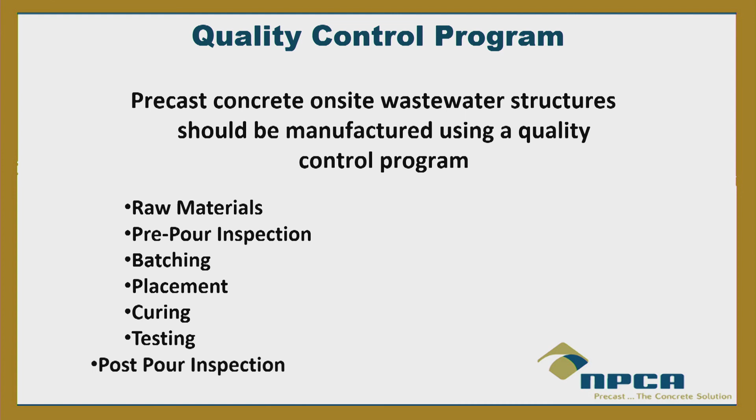Little teaser for you as you're eating—I wonder what he's going to be talking about in 115. I'll be right over here, by the way.

So rely on your local producer if you have any questions, or rely on us. What can we do? We can put more stringent rules and regulations in, which we've done here in Texas. Just communicate with the authorities and with the precasters on what works best for you.

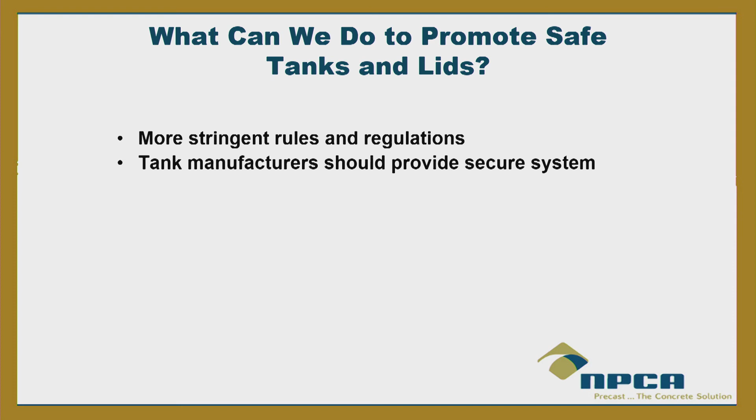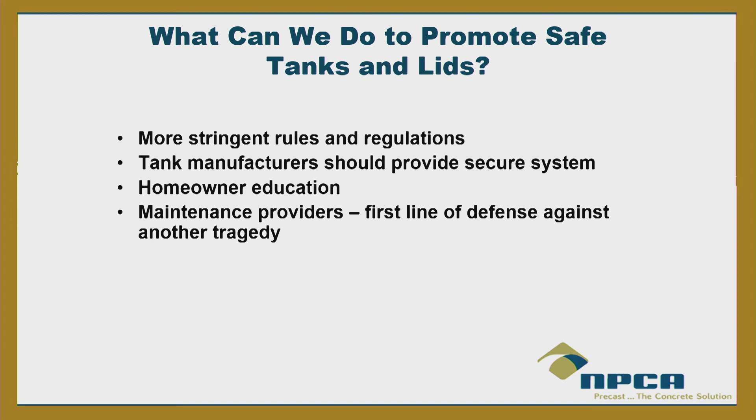Tank manufacturers should provide a secure system. Homeowner education is important—talk to the homeowner, communicate with them. Maintenance providers are often the first line of defense against another tragedy, so thank you for doing what you do and letting homeowners know as much as you can.